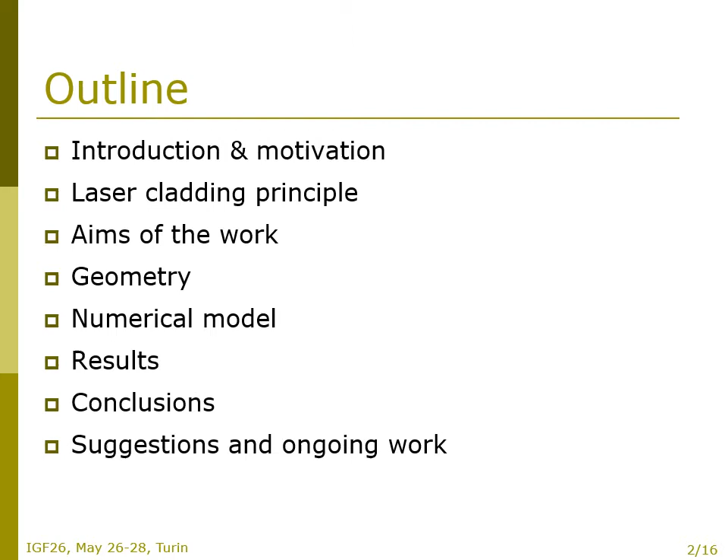Our presentation has got the following parts: introduction and motivation, few words about the laser cladding principle, aims of the work, geometry and numerical model, then the most important part about the results and from them resultant conclusions, and finally several suggestions and ongoing work. So let's start with a short introduction.

In industries such as automotive, aerospace, petrochemistry, and so on, there are many components of various machines exposed to, for instance, high mechanical stress and or chemical effects or high temperatures. Thus, it leads to reduction of lifetime of such components, which is, of course, unwanted.

Laser cladding is widely usable in machine parts, repairing, and functional coatings because of its main advantages. Many variants of functional layers can be applied, lower dilution rate, small heat-affected zone, and good metallurgical bonding between coating and substrate.

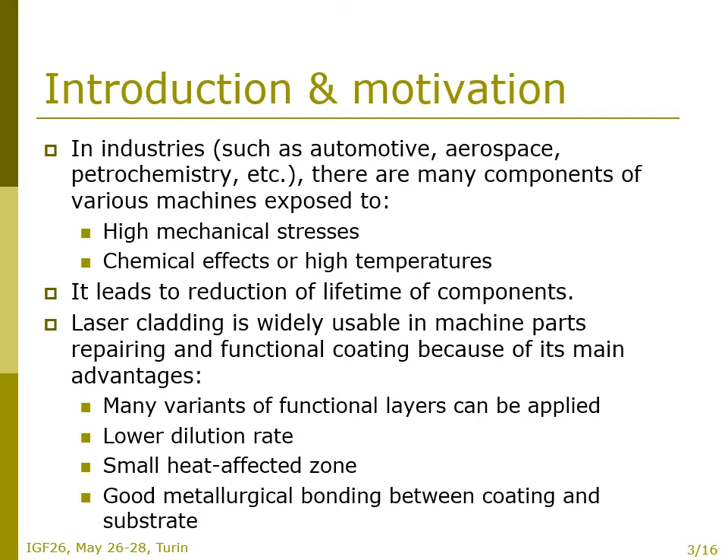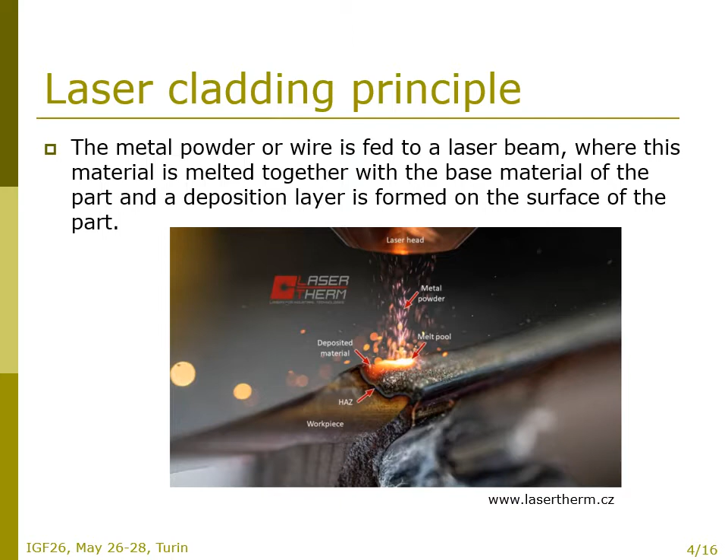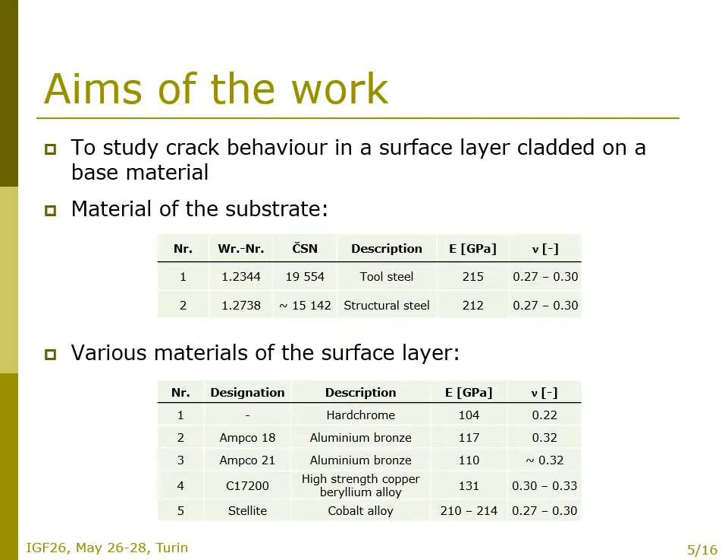As the materials of the surface layer, the following material can be used: hard chrome, two kinds of aluminium bronze, high strength copper beryllium alloy, and a cobalt alloy. And also you can see the elastic properties again.

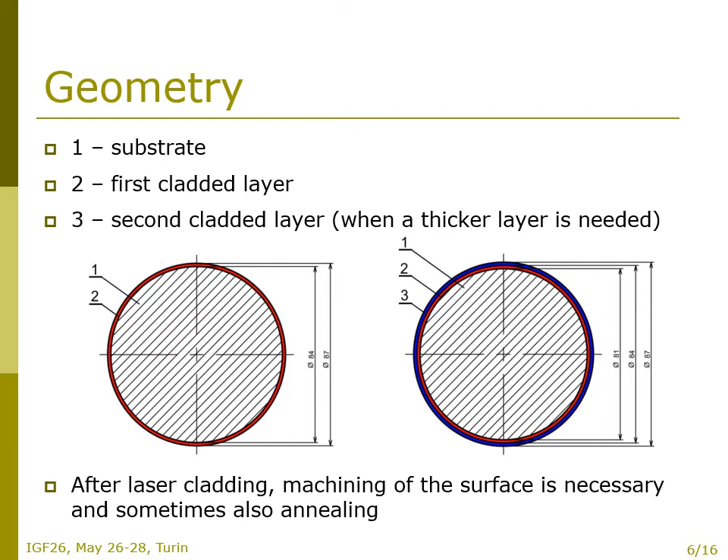So, with regard to the real structures, the following geometry was chosen for numerical simulations. The outer diameter of the component is between 80 and 90 millimeters, where the substrate represents the massive part of the component and a thin layer or two are cladded on its surface. After laser cladding, machining of the surface is necessary, and sometimes also annealing.

Also, the influence of the thickness of the layer was investigated, and the values of 1, 2, and 3 millimeters were considered. The crack was modeled from very short to very long in the surface layer. In the finite element software, quadrilateral 8-node elements were applied. They are called PLANE183 in ANSYS.

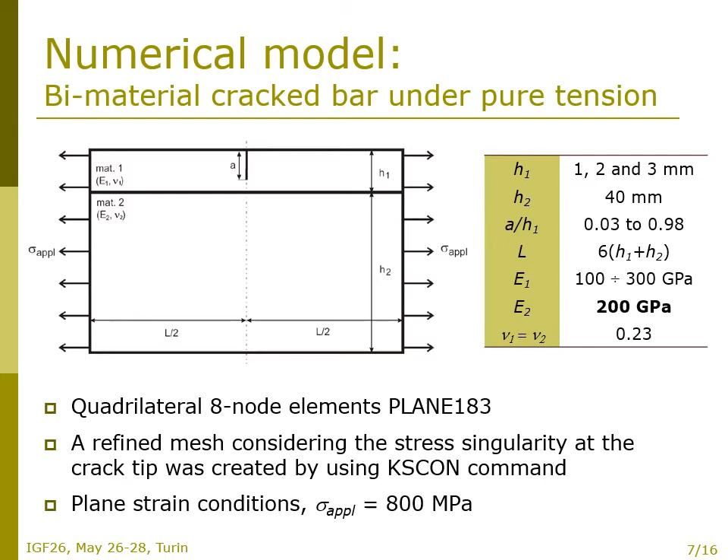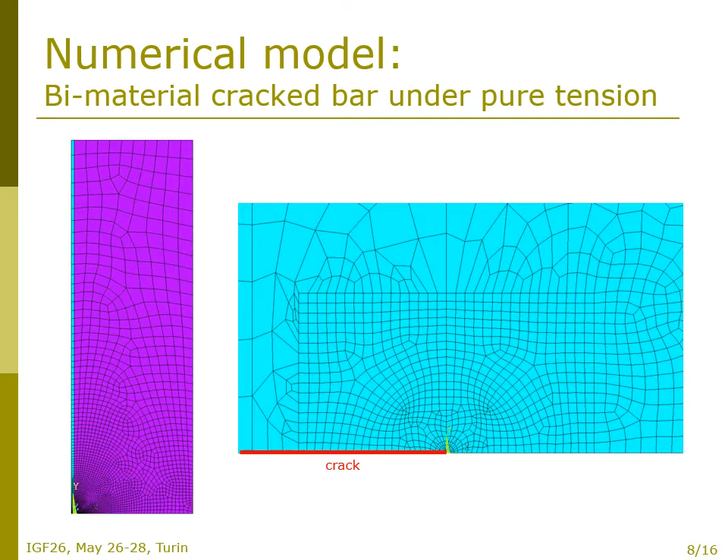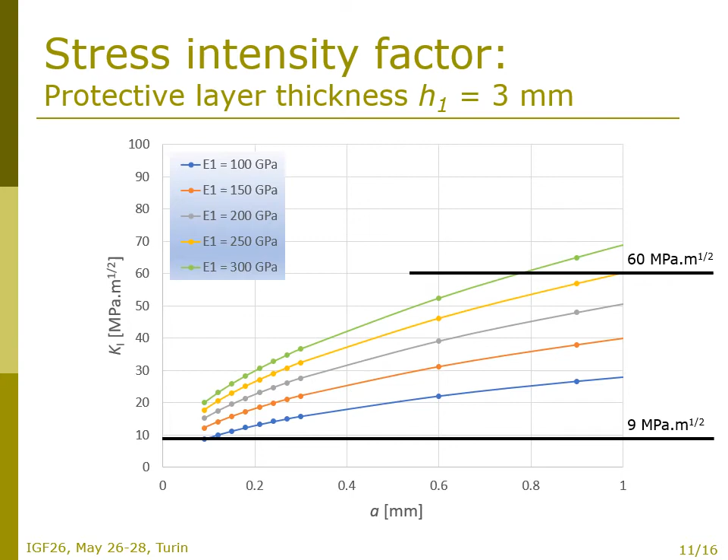When the results are mutually compared and analyzed, the following discussion can be made. Higher Young's modulus values of the protective layer in comparison to the Young's modulus of the substrate make the fatigue crack propagation easier or faster, let's say. All of the materials considered as the protective layer, hard chrome, aluminium bronze, high-strength copper beryllium alloy, or cobalt alloy, are therefore more compliant than the construction or tool steel, or at least as compliant as the steel.

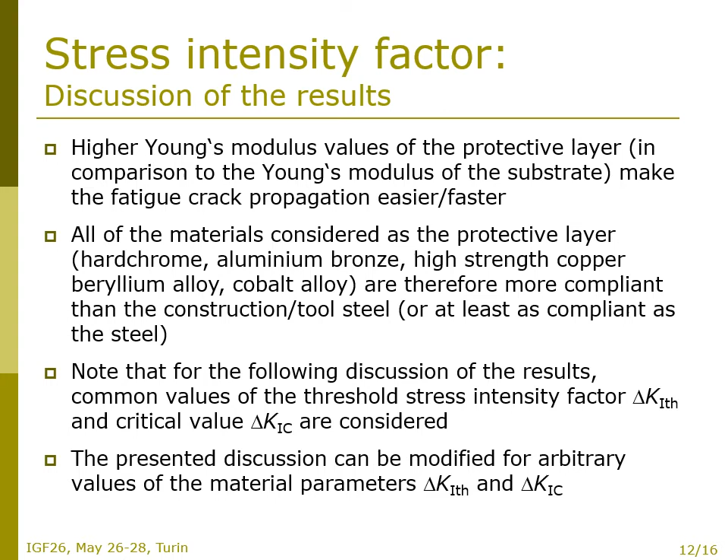Note that for the following discussion of the results, common values of the threshold stress intensity factor delta K1TH and critical value delta K1C are considered. The presented discussion can be then modified for arbitrary values of these material parameters. Thus, considering the threshold stress intensity factor of 9 megapascal square root meters, a crack of the length of 0.03 millimeters will not propagate in a homogeneous steel at all.

The more compliant is the protective layer, the longer some surface defect can be present without starting to propagate. For example, if the Young's modulus of the layer is 100 gigapascals, then the threshold crack length is equal to 0.13 millimeters. Moreover, a higher protective layer thickness increases slightly the stress intensity factor values for the same crack length. It means that it makes the crack propagation easier or faster, let's say.

Considering the critical value of 60 megapascals square root meters, the unstable crack growth occurs when the critical length of the crack is equal to 1.4 millimeters, when only the substrate material is considered. The compliant surface layer then increases the critical length necessary for unstable crack growth. For instance, if the layer has the thickness of 3 mm and Young's modulus of 150 gigapascals, the critical length of the crack is equal to 2.5 millimeters. Of course, for lower Young's modulus, AC is even higher.

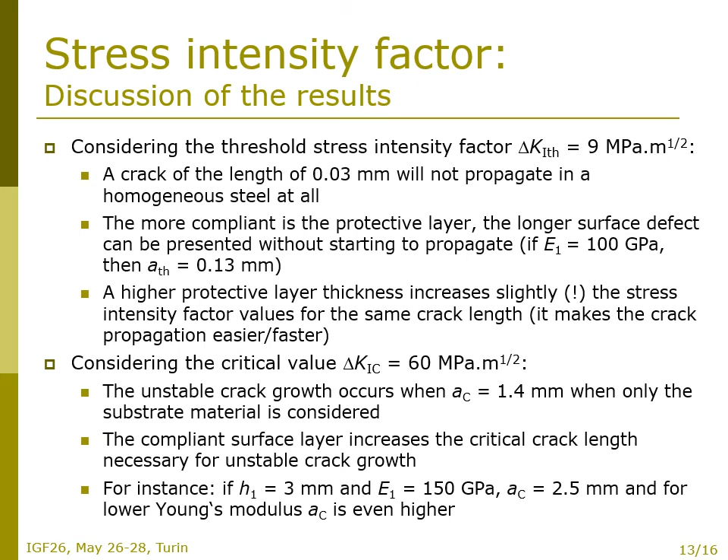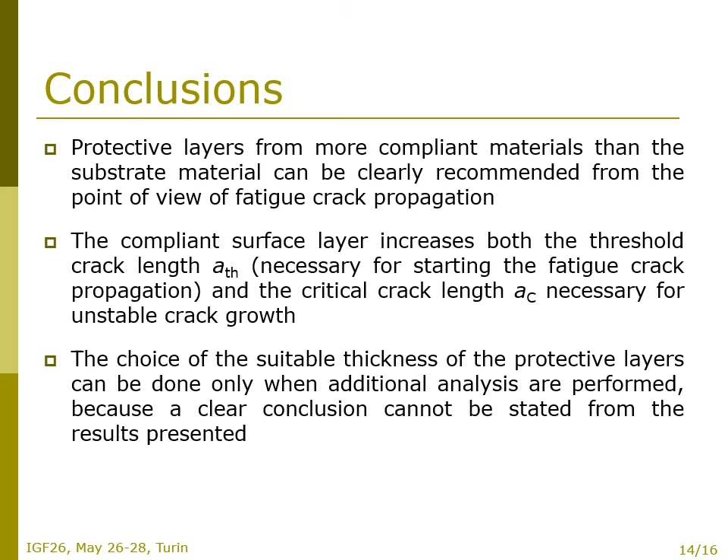Thus, more general conclusions can be stated. Protective layers from more compliant materials than the substrate material can be clearly recommended from the point of view of fatigue crack propagation. The compliant surface layer increases both the threshold crack length, ATH, necessary for starting the fatigue crack propagation, and the critical crack length, AC, necessary for unstable crack growth. The choice of the suitable thickness of the protective layers can be done only when additional analyses are performed, because so far a clear conclusion cannot be stated from the results presented.

At the end of the presentation, the following suggestions on the future work can be made. The results presented are a part of the project Influence of the Bimaterial Interface on Initiation and Propagation of a Short Fatigue Crack, which started 2 months ago. These pilot results are going to be complemented by lots of additional studies, such as other types of loading can be applied, or the behavior of a crack with its tip directly at the bimaterial interface can be investigated. Crack entering the substrate material can be modeled, and its behavior can be investigated with regard to the elastic properties of both materials, protective layer and substrate, and so on.

The project should bring recommendations on the proper material of the surface layer, as well as on the choice of its optimal thickness to ensure as high fatigue life of the component as possible.